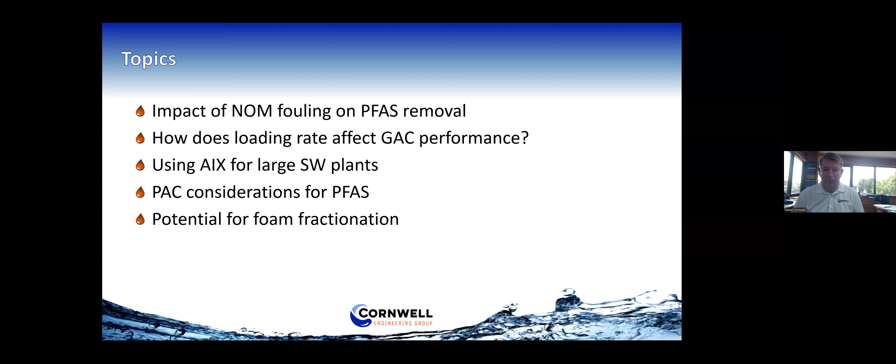We'll talk a little bit about NOM fouling on PFAS removal, how loading rate affects GAC performance. I'd also like to talk about anion exchange for large surface water plants, some PAC considerations, and potential for foam fractionation. So we'll just hit the high points of several of these items and show you some of the things we've been finding.

First of all, this is some work done at Passaic Valley Water Commission. Jim Mueller is going to talk, I think tomorrow, on the overview of what they're doing and how they're handling this project. But this is some pilot testing they've had us doing for quite some time on GAC. The first thing we did, in what we called phase one, is look at 4 different carbons, and we tested empty bed contact times of 7.5, 15, and 20 minutes. I'll talk about that in just a second. All this testing was at 2 GPM per square foot, below what you might actually design for. And we came up with these results. Of course everyone here knows 15 to 20 minutes is the traditional empty bed contact time used or recommended for, in this case, PFOA. PFOA is their limitation—they have PFOS over the level also, but PFOA is the limiting compound here.

So you can see, first of all, I'm just showing a traditional breakthrough curve—you'll see a few of these here. For PFOA, this is one of the 4 carbons. I plotted this as actual concentration, and we've called the detection level 0 in this particular slide, as you can see. This is showing the breakthrough curve. So the first thing to note is at this 7.5 minute empty bed contact time, PFOA was removed below the detection level.

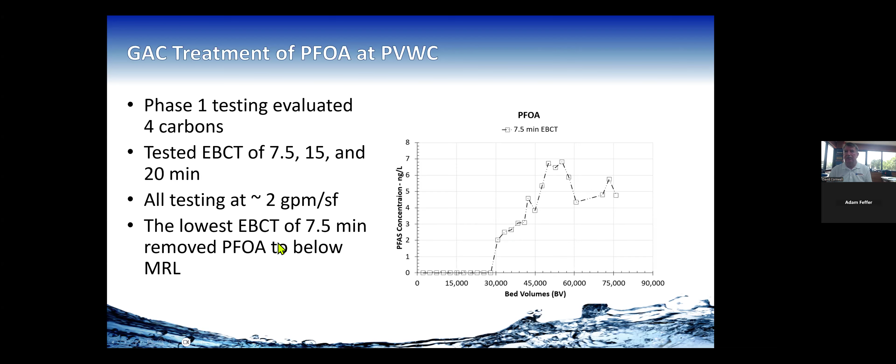Let's look at now what happened at the other empty bed contact times. I'm showing all 4 carbons here. This one down in the bottom right is the one we just were looking at. You can see the gray here is the 7.5 minute. Then look what happened: we went to the mid, the 15, that's the middle port, that's the 15 minute in blue, and the 20 minute is in red here.

You can see that a couple of things happened. One critical thing is the bed volumes got smaller - less carbon utilization, quicker bed volume breakthrough as the empty bed contact time increased. That's classical NOM fouling. As soon as you'd see that, you'd say we've got NOM fouling going on here. That's one of the reasons we tested this smaller bed volume.

These were kind of just the general conclusions. You can see the ranges here of bed volumes treated from 7.5 up to 20 minutes, and what that looked like just a little bit as we were doing our experimentation.

The other thing that's going to be important as we talk about this plot: particularly at the 15, because we were kind of running out of time and effort in this phase 1, we didn't get the 20 minutes all the way we'd like to. But you can certainly see at the 15 minute here this curve is steeper - again, not unexpected with NOM fouling that we're going to get a steeper breakthrough curve. This will be important in some of the data analysis as we go forward. As we moved out here a little bit, we get a steeper breakthrough curve than we got with most of them at the 7.5 minutes.

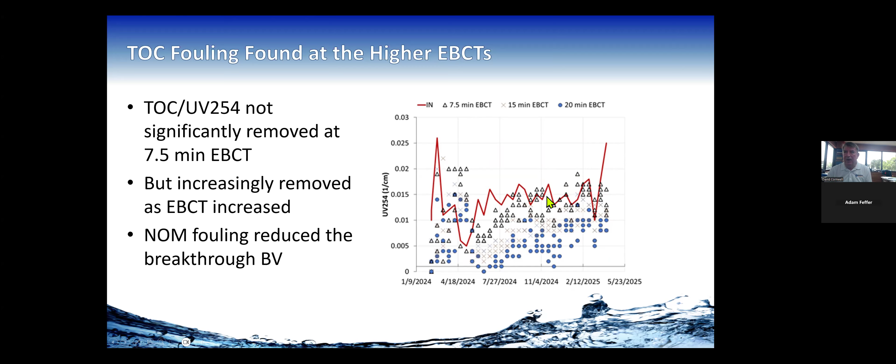You can see quite distinctly here what happens with the UV and TOC - a similar effect, but it's a little better spread out here. 7.5 minutes are these triangles. You can see there's a little removal at the beginning, but as time went on, there's almost no removal, taking half at 7.5 minutes, which is not unexpected for TOC, right? We designed TOC contactors that take 15 to 20 minutes to remove much TOC.

And you can see as we move down here, we've got the X's as the 15 minute - certainly below, more is coming out - and we've got the blues here at the 20 minutes, more is coming out. So we certainly were taking out, especially at these higher empty bed contact times, quite a fair amount of the NOM, and that was causing fouling in the micropores, and we weren't getting as efficient carbon usage.

So what does that mean if we design for a longer time than where we have NOM fouling? Because 7.5 minutes is not traditional, right - we don't usually design for PFOS, PFOA according to literature for 7.5 minutes. I will say New Jersey DEP has been very cooperative with us at Passaic Valley as we move forward to decide. They haven't decided what they're going to do yet, but as we move forward...

What would happen here if you had the same mass of PFOA removed as you increased empty bed contact time where you got fouling? You'd of course have poor GAC utilization, meaning more GAC regeneration because fewer bed volumes are being treated. In practical terms, that's more truck traffic, more pounds of GAC being regenerated, and a higher regeneration cost. So all of this results in generally higher regeneration, more traffic, more pounds, if you're breaking through sooner in terms of bed volume for the same mass of PFOA removed.

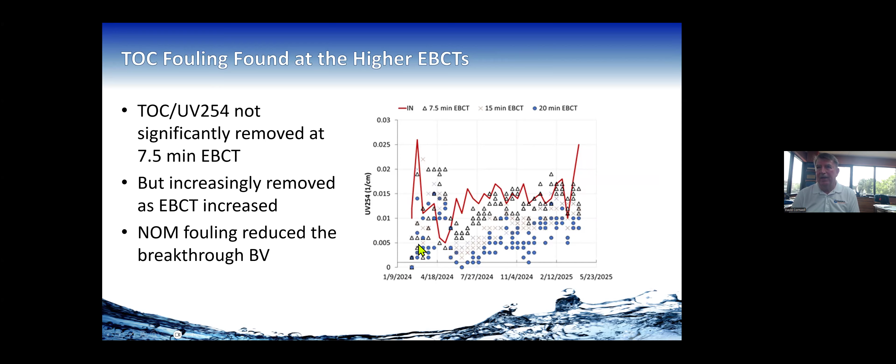There's some indication that it's going to get worse. You can see here that the fresh carbon at 20 minutes was way down here in UV. So if I had 40 minutes, more of the bed is at 20 minutes or plus, I'm very likely to follow something like this. If it just stops totally, no more NOM fouling, it'll still be less, but it won't be drastic. So you could be somewhere here.

The lesson learned is don't operate all your contactors if you have NOM fouling. Keep some contactors turned off and try to keep that EBCT down.

I want to remind everybody about the benefits of blending. This is again the example for Passaic Valley. They have a situation where on an average day they might have 6 to 7 of their 10 contactors, depending on what the final design looks like, going through this. And here's the breakthrough curve, the same one we've been looking at, that may be done again, exactly where you cut it off could be done somewhere in this 35,000 bed volume range.

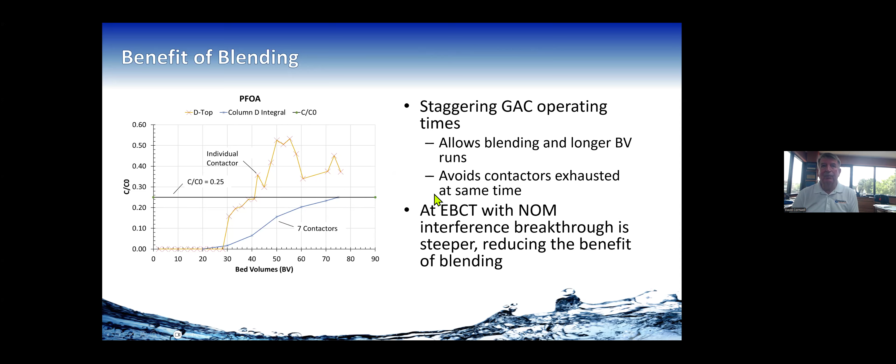If you do blending by staggering the operation, first advantage, they don't all stop at the same time. I don't have to regenerate them all at the same time, but you also spread that out so that your blended water going out of the plant never exceeds your goal. Now I'm up into the 60,000 to 70,000 bed volume range, almost doubling the bed volumes by operating with blending. So don't forget that. You may be doing it, but if you're just cutting these off here instead of looking at your blending situation, you may be using carbon much faster than you need to.

The last thing on carbon I wanted to talk about, we know this from the literature: when you have a micropollutant and you increase flow rates or loading rates while keeping the same empty bed contact time, you should get the same breakthrough curve with a micropollutant because it's micropore limited.

I'm just showing here, we did test this. Our original was at 2 GPM per square foot. We tested 4 and 6 - 4 being the purple, green being the 6, and all the others being 2 GPM per square foot. Very, very similar breakthrough curves. You're always going to get some differential, but very similar ranges as we get into this 4 range. It's so impractical to test 6 GPM per square foot at 20 minutes in contactors because you need 2 or 3 of them in series in a pilot plant. So it's much easier to test lower flow rates, and then it should be the same going forward.

Anion exchange - just a little bit on anion exchange. Normally, as you all know, this is operated in pressure vessels, but limited to about a 12-foot diameter. Guidance also says for a surface water plant, use a pre-contactor cartridge, some kind of cartridge filter ahead of that to take out small particles. For a large plant, both of these are impractical.

You'd have a whole farm of vessels out there. So we went ahead and said, hey, what the heck, we're going to test gravity without pre-particle removal. We had some indication gravity would be fine. We didn't know about the pre-particle removal not being used. You can see here, these are still running, and we're now at almost 140,000 bed volumes with 2 different anion exchange resins that we're using. So far still very successful in those operations, and we'll see where we get into in terms of breakthrough. But again, this is our gravity system, 6 GPM per square foot, empty bed contact time of 3 minutes.

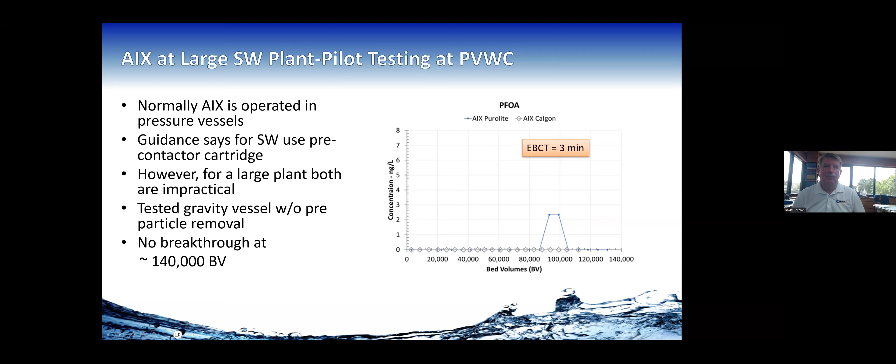So first of all, pick a good product. Secondly, what I'll talk about is the possibility of recirculating the PAC. We know that the PAC in a one-pass system is not utilized very fully.

So what we did in the laboratory is a series of testing where we either did a pre-contact tank or just rapid mix, and added the PAC into there. We found rapid mix worked pretty well. Go ahead and do your coagulation, flocculation, sedimentation, take the sludge off the bottom, and recycle it. In this case, it was an iron coagulant. Recycle the PAC and the iron back around to the front end, and you have your treated water come off.

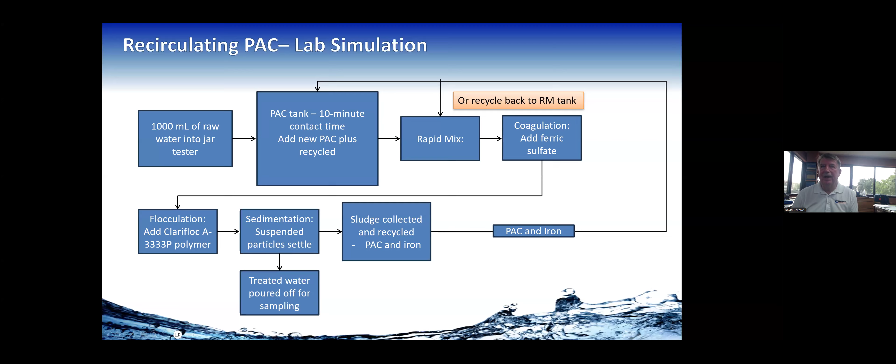In other words, we always think PAC is not practical, not useful. Well, the pounds used is pretty close to the same, which is kind of amazing. So PAC might be something you still want to look at. Obviously, you don't have to build all those contactors and things.

Last thing I want to talk about here is, I guess I've worded as Cornwell, we're excited about the possibility of foam fractionation. Temple University, if you get a chance, look at some of the things they're doing. I don't know if anybody from Temple is on this today. They've been doing exciting things. I'm only aware of one company trying to work on this, which is Evocra. There may be some more, but they seem to be the one that are out there for the most part.

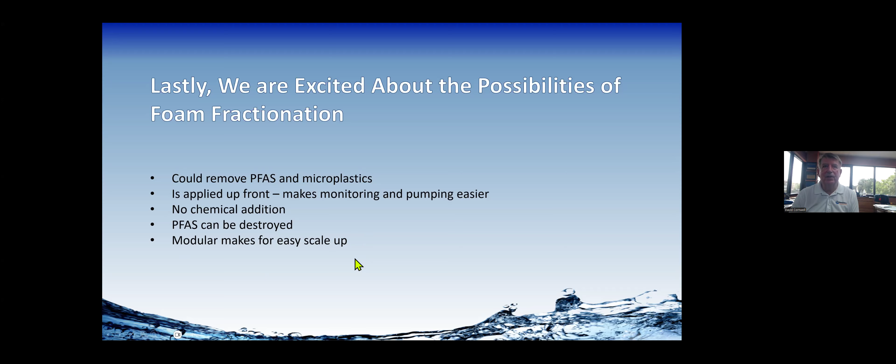If you're removing the microplastics, you probably don't want to recycle it. So you might want to come off of this concentration system and discharge this in some way. It has no PFAS in it, but it could have microplastics. Where do they go? I don't know. It's something we have to figure out, but I find that quite interesting.

So my summary for today, this morning, to get us all started is, unfortunately, the compliance window is very tight. And that means for utilities, they have limited time to explore and develop new technologies. I wish there was more time. But if you've got to start designing and installing things, you can't start studying things very well either.

Some utilities might be able to use short-term compliance measures to allow technology to catch up and not build massive GAC contactors or something like that. Maybe PAC is one of those things that could work. I pointed out some of the issues to keep in mind if you have NOM for GAC. And just a very interesting conflict: optimal PFAS removal is achieved when TOC is not removed. But EPA is kind of thinking we're going to get a dual benefit here of PFAS and TOC. If you optimize PFAS, you won't get TOC. If you optimize TOC, you're really going to be using up carbon for PFAS.

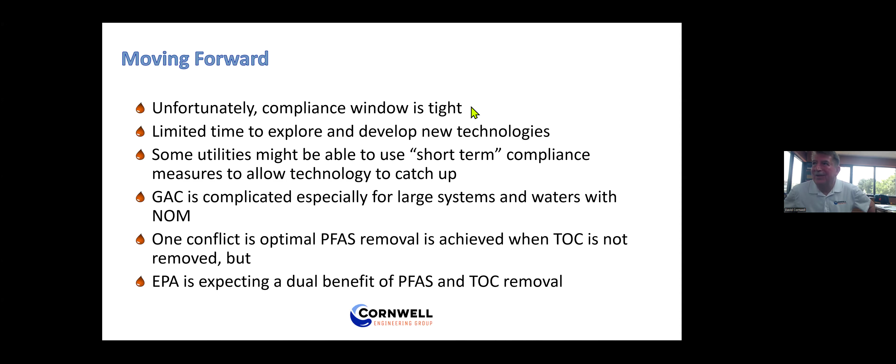Welcome, Eric. So a couple of questions. The PAC that you were talking about, how was it applied? As a slurry?

How was PAC applied? Well, Pat, we did the PAC, of course - that's laboratory work. We do slurry at first because we want to get it pre-wetted. If you're in a full-scale plant, I like slurries. You could use a slurry PAC system, or you could dry feed it if you've got some mixing for it ahead of time.

Okay, and the other question - did the anion exchange media require backwashing? What was the frequency and head loss buildup? Was chlorinated water used? Good, very good questions.

No chlorinated water on these particular resins. It does have to be backwashed. And we kept the loading rate to 6 GPM per square foot because the head loss with the ion exchange gets pretty high.

It was quite reasonable at 6. It was in the 3 to 4 range. I think we could have gone a little bit higher than the 6, but that's also probably where GAC would be designed. So the contactors could be almost the same contactor for GAC or ion exchange.

I don't have the frequency right in front of me. I want to say that was in the 4 to 6 week range where we did have to backwash, and we keep it below fluidization velocity, just like GAC. So it did require backwashing, yes.

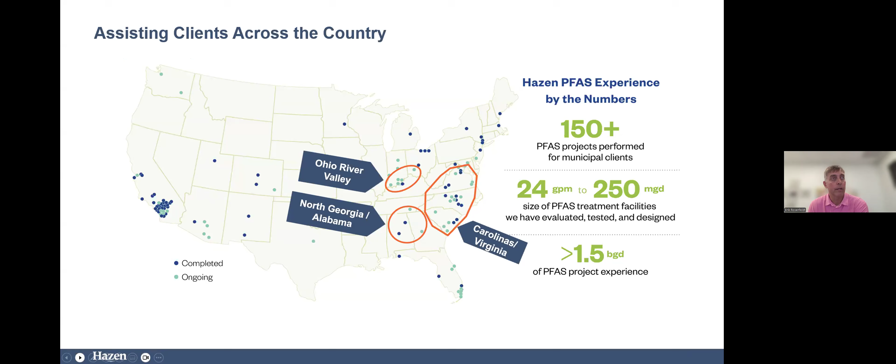And what have we learned? Well, we've learned that surface water treatment for PFAS is somewhat unique. Some of the things that Dave talked about are certainly lessons that we've seen.

But a few of the big things to keep in mind is that the water quality in these plants are often variable, wide ranges over time and space, with everything related to TOC, algae, lots of other water quality challenges as well. In addition to that, our PFAS levels are often variable - so you may have wide swings in PFAS from day to day in these surface water facilities.

And another thing to think about is there's often already a robust treatment process in existence, one that's been designed for surface water treatment. So a lot of these PFAS treatment processes have to integrate within that existing treatment plant. And so whatever treatment process we use must be effective for PFAS, robust to variable water quality, and ideally provide multiple benefits. Challenges we face include plant hydraulics, often space constraints, of course operability and constructability, and then funding these projects is always a challenge.

So this isn't new for surface water utilities. They've been fighting the fight against water quality challenges for years. And often we can look at operational approaches or infrastructure approaches for a lot of water quality treatment enhancements. So a lot of things can be managed by tweaking current operations. Some of these things definitely need additional infrastructure added. And then there's this gray area where there's things that we can do operationally and infrastructure-wise. And I'm going to loosely say that PFAS kind of fits in there.

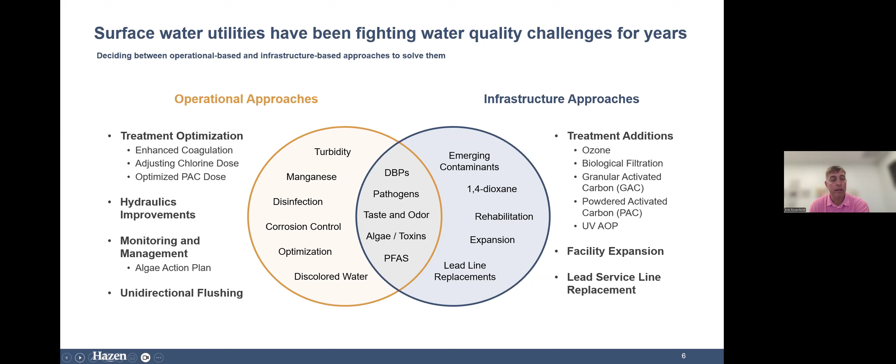Typically, we do have to do some sort of infrastructure improvements, but the idea of PAC allows us an option that most utilities at least are familiar with, and many already have some infrastructure to deal with. And I'll explain that a little bit more. I'm not going to go through this, I don't have time, but PAC has several advantages, lots of potential concerns.

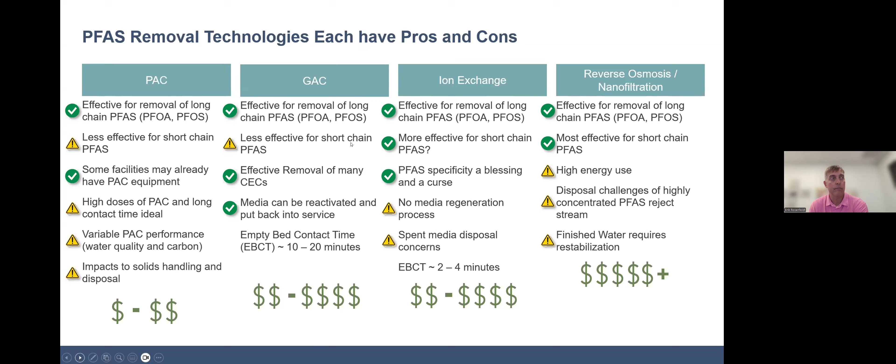GAC is another effective technology with a few more advantages and a few less concerns related to PFAS treatment. Ion exchange is sort of similar, and then of course reverse osmosis and membranes are highly effective but significantly costly. And we've actually seen more of these high pressure membrane operations for PFAS solutions on surface waters, which has been a little bit of a surprising observation over the first few years of PFAS treatment.

So the first study I'm going to talk about is in South Carolina, and the question here is deciding on GAC, and it's really what factors went into understanding whether GAC versus PAC was the option to go with here. So this is an eastern lowland surface water. It is not an easy surface water to treat. It has high natural organics, high manganese, lots of algae, taste and odor compounds, potentially some cyanotoxins as well. And then recently, of course, they found PFAS in these sources.

There's two water plants here fed off a large river, and the water plants are connected through a canal and a series of reservoirs. And so both plants have challenges with all of these water quality issues, and we're looking for a solution clearly to address PFAS, but then also to look at creating a more robust process for some of their other challenges.

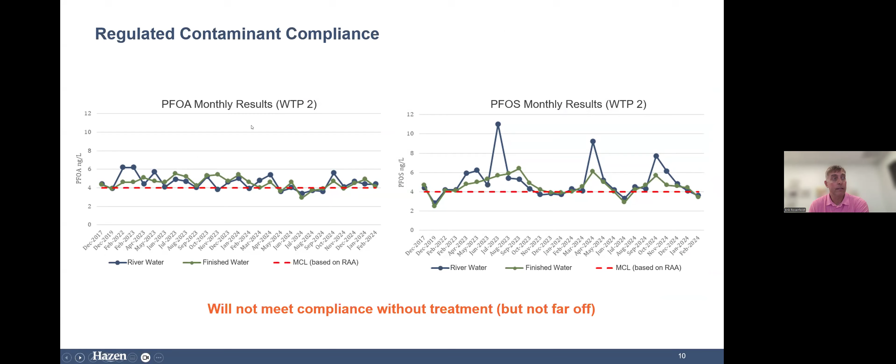So the PFAS challenge is something that we often see with a lot of surface waters. It is above the limit, but not a whole lot above the limit. This is another thing that we've been seeing a lot with surface waters: rarely do you see anything above 10, but sometimes you might see a spike above 10 for PFOA or PFOS. So this system will not meet compliance without treatment, but it's not far off.

So our client first underwent a rigorous technology selection process where they piloted advanced activated carbon techniques, both powdered carbon and GAC, as well as ion exchange. They decided against RO and nanofiltration membranes prior to piloting, but they definitely piloted GAC and ion exchange. Benefits for the activated carbon were that both provided effective PFAS control, GAC provided robust current and future contaminant control, and then, of course, there was flexibility in how to deploy it.

The concerns they identified were operational intensity of PAC, and of course, on the other side, GAC was a more capital-intensive process. So they decided to employ either PAC or GAC to address PFAS and additional water quality concerns, but we had to help work through that process of GAC versus PAC. So the first thing we did was look at the benefits of powdered carbon versus GAC. There was another option that they looked at, but this became expensive and didn't see a whole lot of benefits over the other two.

So powdered carbon was effective for their PFAS challenges. It was effective for algal-related taste and odor, less effective for DBPs in the testing that we looked at. It didn't provide quite a solution for manganese; distribution system and other things were not quite as addressed, but it was significantly less expensive. GAC for PFAS was very effective, good for algal-related taste and odor, excellent for their DBP challenges.

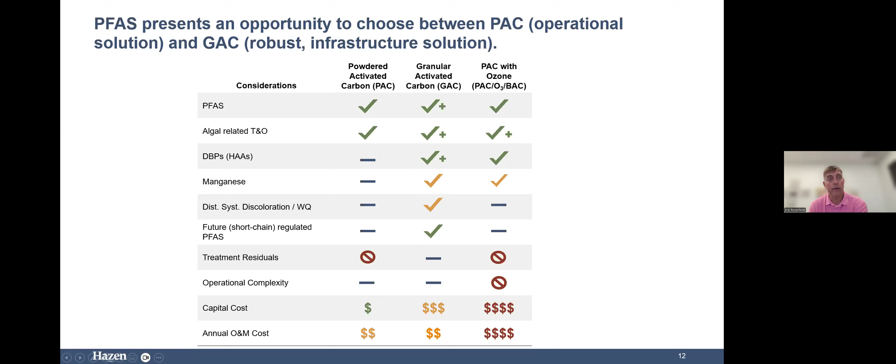It allowed them to chlorinate their existing filters more aggressively, so it opened up an opportunity for better manganese control, also less distribution system discoloration as a result, and then there were some other added benefits. So we got lots of benefits. We can see lots of benefits for GAC, but the challenge, of course, is that GAC is significantly more expensive. So we weren't going to get our way out of here on a life cycle cost analysis.

Even though powdered carbon required some improvements for residuals and it would be an operationally intensive process, it was still significantly less expensive. So how could we work with the utility to create a situation where clearly the benefits were outweighing the cost difference? And we did this through an MCDA process, multi-criteria decision analysis, where we talked with the client and we weighted their economic, regulatory, O&M, and then community benefits and costs.

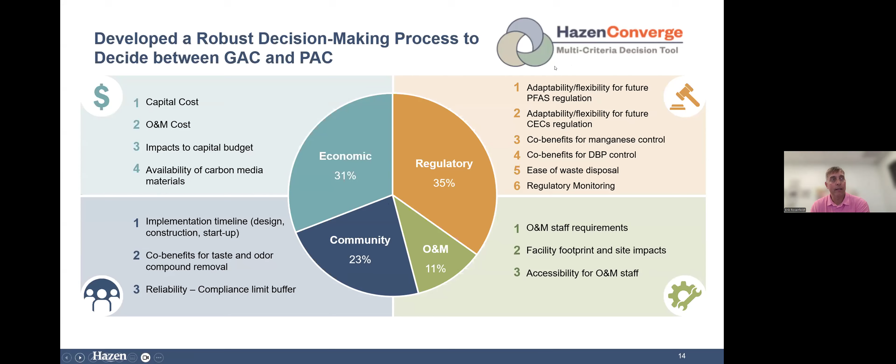So you can see that yes, economics were of concern for them, but it wasn't an overwhelming concern. It came out to be about 31% of their concern pie, and the other options like regulatory and community were really the ones that lifted the analysis. So at the end of the day, working together with the utility and the decision makers, we were able to understand that the water quality benefits that they'd see with GAC clearly were more important to them than the cost challenges.

And so the decision was to go to GAC, utilizing this transparent cost benefit analysis approach to make it clear that they could see the benefits of the additional water quality, and that was important enough for them to overcome the significant cost differential between PAC and GAC.

So the second study I'm going to talk about is one for a client where we came up with the exact opposite solution, right? This one decided on PAC, at least for the short term, and this got to Dave's idea of let's implement a short-term solution where we might be able to do some things in the longer term that could allow us to avoid a more capital-intensive project.

Again, this is a Virginia utility, a large utility, 125 MGD, and they have PFOA and PFOS in their finished water, but also in their source water. Averages are slightly above the limit. Their maximum doesn't even get up to 10, but especially for PFOA, they're above 4.0 nanograms per liter 82% of the time. They do have additional PFAS chemicals that are detected, but they developed these solutions for PFOA and PFOS at this time.

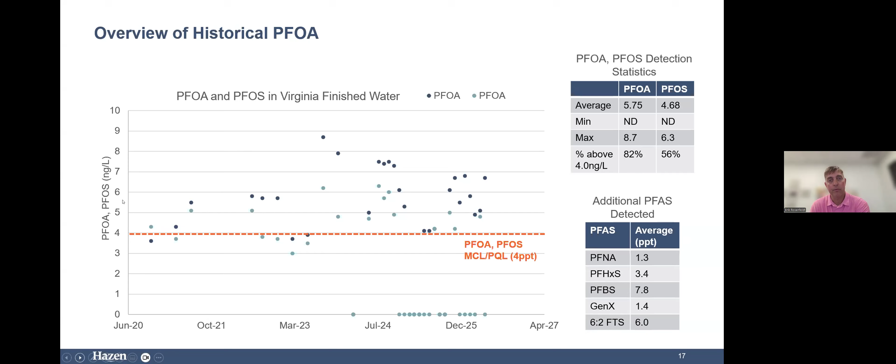And you can see again where I talked about highly variable from day to day, week to week, month to month. There's significant changes in PFOA, PFOS, but also other water quality concerns as well. This is a robust treatment process. It has ozone and biological filtration. And we were really looking at three different options: powdered carbon up front, post-filter GAC or ion exchange, or replacing the biological filtration with filter adsorbers.

The PAC advantages, again, least expensive capital option. It's under design right now, and a little bit of a spoiler, it's about a $20 million solution. The PAC has to be fed at 25 to 30 milligrams per liter, and it can effectively remove 40 to 50%. Concerns that were in the mix include long-term PAC disposal concerns. It may impact their current residuals handling processes. We still are working that out. And then an operational strategy is yet to be determined.

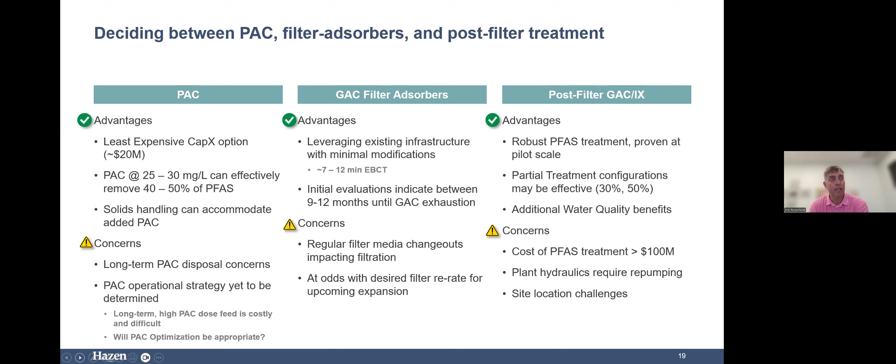Clearly, with that wide variability, sometimes above, sometimes below the limit, we would like to be able to increase and decrease our PAC dose as appropriate to save some costs. GAC has its advantages, as does ion exchange, and there's significant costs related to those as well. We did see a difference with added detention time. If we fed at the intake versus at the front of the plant, we got about a 20% dose reduction in PAC.

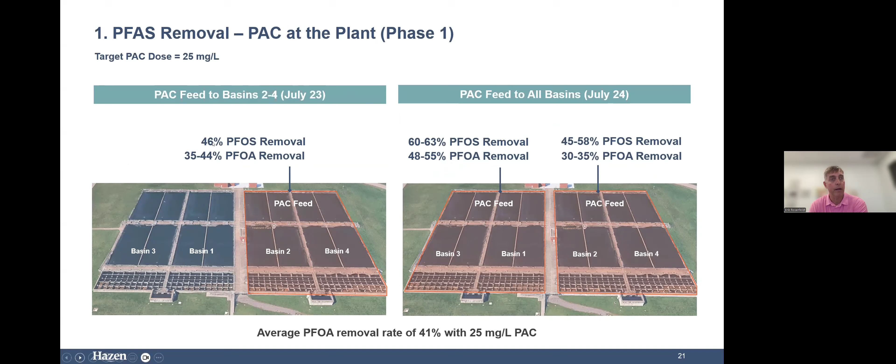We did a full-scale test, which was really interesting. We looked at half the plant and fed PAC up front, and we saw about 46% PFOS removal, 35 to 44% PFOA removal. At the end of the day, we came up with a PFOA removal rate of about 41%, which was our target, and PFOS was a little bit better with 25 milligrams per liter PAC. And moving forward, there's several things that are going to happen here. They're moving forward with the PAC design and construction.

So that's going to be a short-term solution. But in the meantime, there's lots of things that can be done in terms of source water protection, additional research looking at other treatment alternatives, and then even some legal action to understand the long-term solutions.

And the final thing I want to talk about is this is a really interesting system that a lot of people probably know about. It's located on a reservoir that has an advanced wastewater treatment plant up front. And there's lots of places that have been identified as potential PFAS sources. And we're currently working with the Water Research Foundation on what we call the One PFAS project, looking at a system-wide approach to managing PFAS chemicals and trying to understand whether,

where are most cost effective to provide the most benefit to the entire system would be considering improvements at the water treatment plant, considering potential PFAS related improvements at the wastewater treatment plant, or even considering potential interventions throughout the entire watershed, more stormwater type interventions to understand if maybe this PAC solution is the right solution

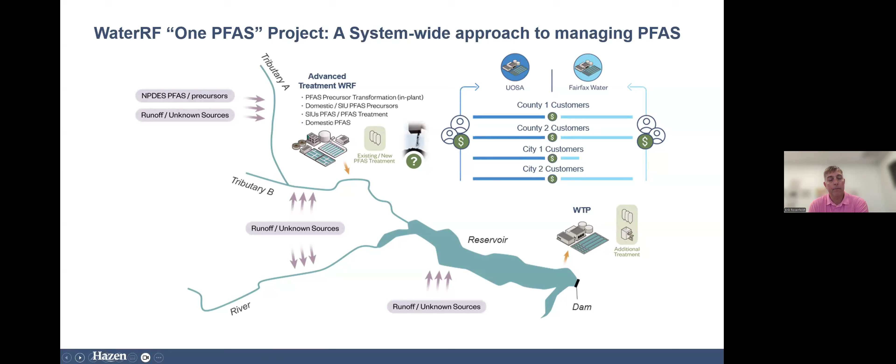for long term because we can find ways to really reduce levels in the source and throughout the system, or even to look at treatment options that might be more beneficial if they're applied upstream somewhere, either at the wastewater plant or even in their collection system with significant industrial users. So keep an eye out for the results from that One PFAS project in the next couple of years.

So in conclusion, surface water treatment for PFAS is relatively unique. There's a lot of things that are needed, including a barrier that can effectively treat PFAS and handle all sorts of changes in water quality, and also manage potential hydraulic challenges and site constraint challenges, things like that. Surface water systems are often larger systems than groundwater systems, not always, but often, and therefore size and scale of effective treatment plants are really important to consider.

And then there are operational approaches, high dose PAC, infrastructure approaches like GAC, ion exchange. And then, as I mentioned, membranes seem to be gaining traction in surface water applications, which has been interesting to watch and be a part of. And then when deciding between technologies, both cost and non-economic factors can play a role and can lead you to very different solutions based on, of course, the desires and the philosophies of the utilities. And then multi-criteria decision analysis can be helpful in making this.

And then finally, in these surface water systems, it's important to remember that active source water control can hold the key to cost-effective PFAS compliance. We're typically not well above and not consistently above the 4 part per trillion limit. And there are opportunities if we can work together collaboratively. It's not easy, but if we can find ways to work together collaboratively, there might be opportunities to really come up with effective holistic solutions and save ratepayers significant amounts of money.

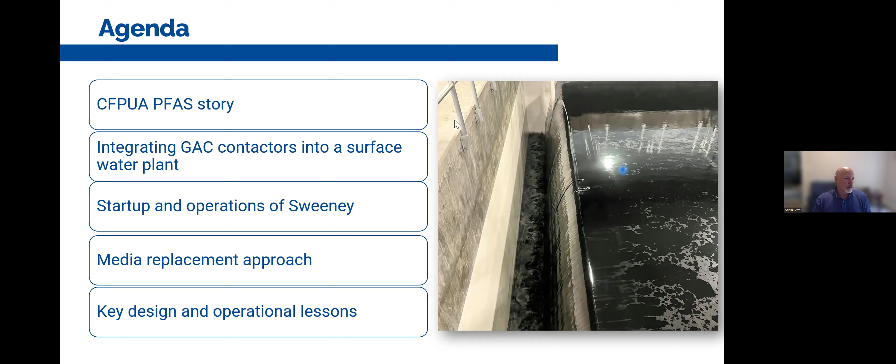As far as we did piloting and evaluation, we ended up on a GAC post-contactor solution. This is their process train: super pulsators for pre-treatment, followed by intermediate and raw water ozonation, biological filtration with GAC, and then the contactors. It was thought best to fit them into the process train after the biofiltration.

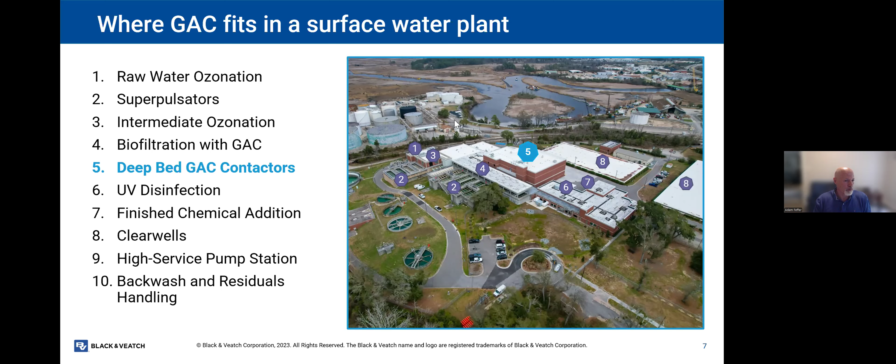This is another way to do it, showing the same HGL considerations, identifying the different changing flow conditions. With surface water, you are going to be more subject to temperature changes and seasonal variability than you might be for a groundwater system, and that has to be considered when you're looking at that head loss and trying to design for worst case conditions under gravity flow.

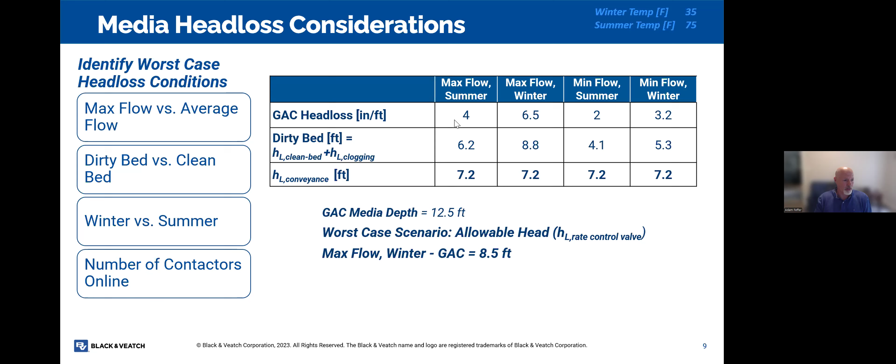The media loading is something people might take for granted: when you are taking media away, it's wet, and wet media is heavy. The limiting factor on transportation of the media is the weight for DOT restrictions on the road. So you need roughly double the number of trucks to unload wet media as you do to load up the dry media when filling these contactors. At least in Cape Fear's case, it's 2 to 3 days of work for loading the contactor with the slurry system in place.

Based on their water quality goals, they were very, very intolerant of any impairments to their treatment goals resulting from the GAC. So we had to wash away pretty much all the arsenic before we put these contactors into operation. That meant 6 to 10 days of backwashing, about 75 bed volumes, before we were able to meet their TDS, arsenic, and pH water quality goals.

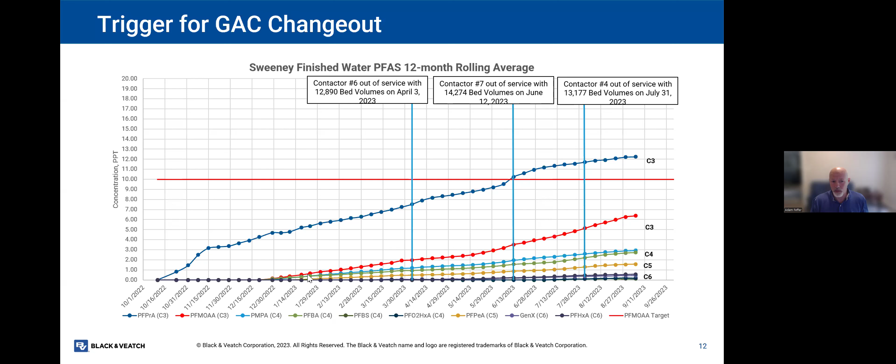What you're seeing here is some water quality impacts, where they did better with their first run than with subsequent runs, so they ended up a little behind. What they would say is they had to do some shorter changeouts.

As far as the cost associated with this, Cape Fear did set a very aggressive changeout target, so these costs are a little more dramatic than you might see at a facility treating exclusively for PFOA and PFOS. But the main takeaway here is that for a 44 MGD facility operating for PFAS on surface water, the vast majority of the cost is associated with carbon changeout. So any optimization you can do of media usage will yield the biggest bang for your buck in O&M cost reductions.

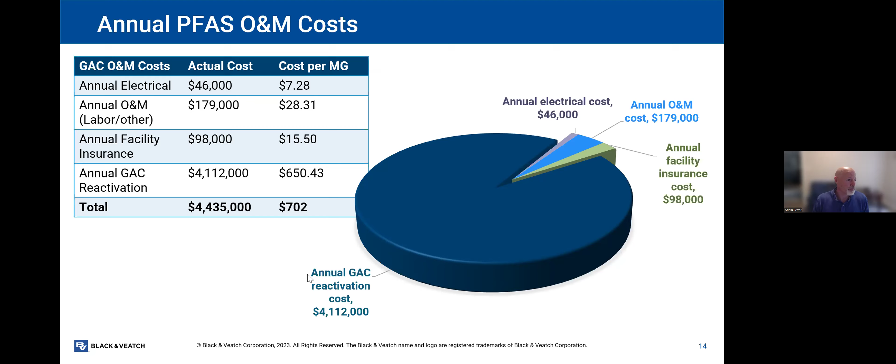Getting into the media replacement approach -- I won't spend too long here since others have mentioned it -- but staggering your breakthrough is extremely important, both from an operations feasibility perspective and from a media utilization efficiency perspective.

This also helps with your startup impacts from arsenic, pH, and TDS, managing those one at a time versus all at once.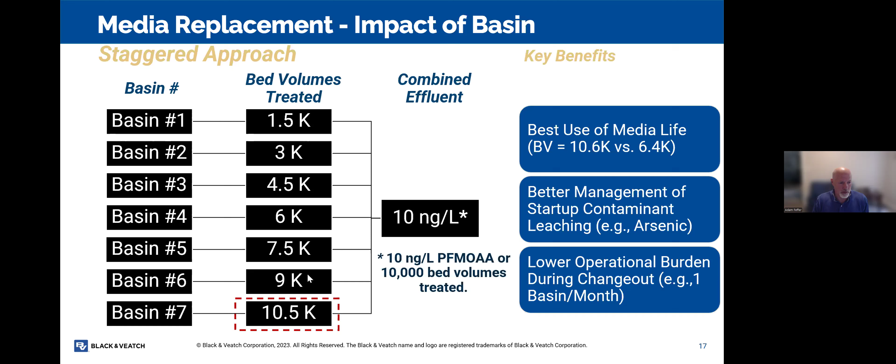And contractually, Cape Fear was recently able to introduce, I think it was a 14, maybe 15 percent cap into their regeneration contract, so they don't have to pay in excess of that if the regeneration doesn't go as expected.

And I think this is a really important point here in terms of determining the redundancy of design. Sweeney operates on average below 50% of their design capacity. And GAC reactivation time is 45 to 60 days from the time it gets removed from the contactor until the time it's available again. So they realize there are significant operational savings from being able to receive GAC from trucks into a contactor at the same time that the trucks are taking out spent GAC. So coordinating the replacement of receipt and delivery of GAC yielded some really significant savings. But they could only do that because they had that space in between their average capacity and their design capacity.

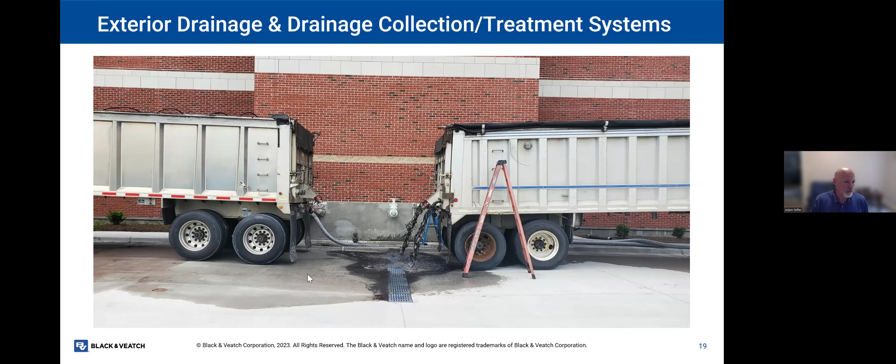So just a summary, getting to the end here of the key lessons learned. Surface water is more variable than groundwater, so you have to be prepared for the worst case challenges in variation. It's very important to understand your hydraulic grade line, and there are impacts to other processes like UV impacts, disinfection impacts, potential CT impacts, and unit process performance associated with the PFAS treatment.

In operation, you really need to have good design for your truck traffic, runoff, and conveyance connections to facilitate life for your operators long term. Balancing reactivation turnaround with your treatment demands is critical for design. So you don't want to over design, but you also don't want to under design and then be slammed for production capacity when you're needing to regenerate spent contactors.

Have a real smart plan for how to deal with the water from up to 6 MGD in the case of Sweeney for each contactor replacement. Make sure you have a plan for staggering your breakthrough so that you have one contactor at a time, and optimizing media life is really your big lever for minimizing O&M costs.

And with that, I'll take questions if there are any.

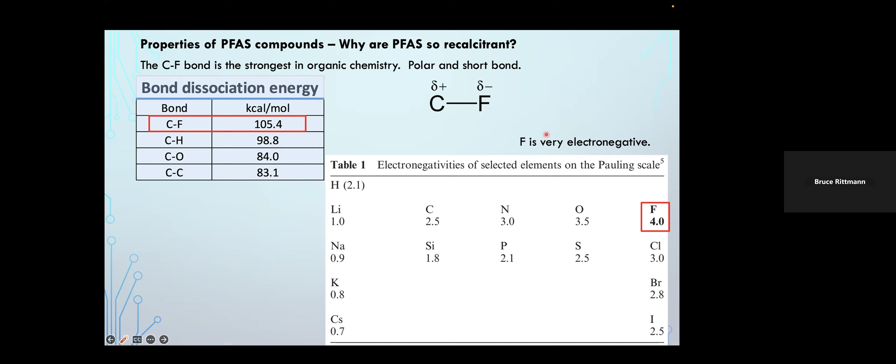So why are they so difficult? There are a couple of corollary reasons. One is that the carbon-fluorine bond is the strongest bond known in organic chemistry. Its bond dissociation energy, as you can see on the upper left, is much larger than any other bond, so it's hard to break. It's also a very polar bond, because fluorine is extremely electronegative. This makes the bond very short and very strong, but on the other hand it also gives us the possibility of defluorination and destroying it through a reductive process. That's what I'm going to talk about here.

Now, I'm the director of the Center for Environmental Biotechnology. I love to biodegrade things, but that's difficult to do with PFAS, especially the perfluorinated ones, because the C-F bond is so strong, and in the perfluorinated ones the C-F bonds are everywhere on the molecule. So it's really hard for microorganisms and their enzymes to access the molecule—this is really difficult.

So what we want to do is knock off some of the fluorine substituents—that is, defluorinate it—taking advantage of the strong electronegativity of the fluorine element to do reductive defluorination. That's what I'm going to begin with today. So how do we do that? Well, we actually do this in two stages.

The first stage is just what I said, reductive defluorination. And as I will show you, we're going to use palladium-based nanoparticles to reductively defluorinate. And you can see there's a little example here. This is PFOA, and you use hydrogen, and you knock off some of the fluorines here and replace them with hydrogens. And now once you've done that enough, then the molecule becomes available for oxidative processes.

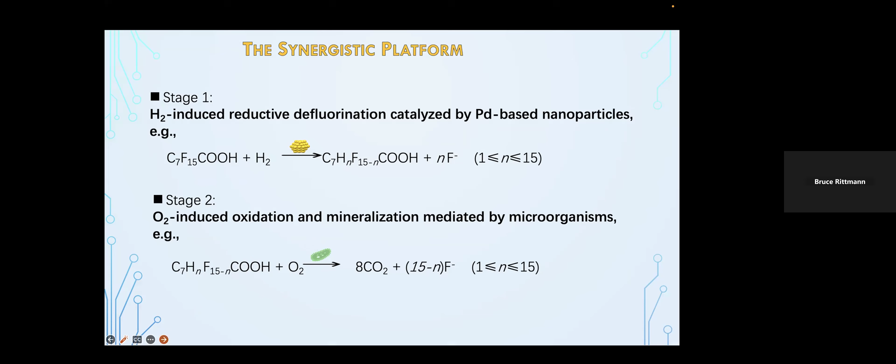And we're going to use microorganisms in what I'm going to talk about today. And they will do an oxidation process that will attack the carbon-carbon bonds as well as more of the carbon-fluorine bonds. And so when we combine these two things together, we can get the complete defluorination and mineralization of these perfluorinated compounds. So in the system I'm going to describe today, we do it in two stages.

Now, the first stage is the hydrogen-based membrane catalyst film reactor. We're going to deliver hydrogen gas through gas transfer membranes. Deposited on the outside of the membranes is a palladium-based nanoparticle film that is really good at reductive defluorination. I'll show you that. Then we're going to take those defluorinated compounds and deliver them over to an oxygen-based membrane biofilm reactor. Now we have a catalytic biofilm with bacteria that are good at oxidizing and continuing to defluorinate these compounds. And so I'll talk about both stages in my talk today.

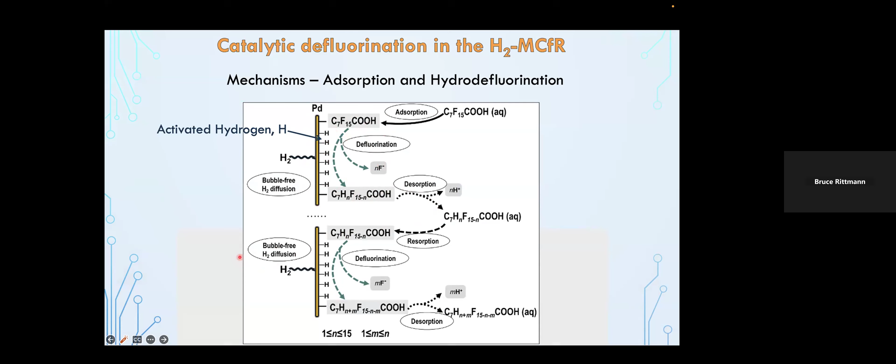So in the first stage, we're going to use palladium. Palladium is a very famous catalyst. And when you put it on the membrane here and you deliver hydrogen to it from the membrane, you get what's called activated hydrogen on the palladium. That's just a single H. This is an extremely strong reactant. So that when something like PFOA adsorbs nearby, it will then react to break the C-F bond, releasing the fluorides and producing defluorinated compounds. And this reaction can continue so that you can produce a suite of defluorinated compounds based on this palladium-based catalysis.

Now, we have to first form the catalytic film. It's actually pretty easy to do. I could show you some pictures here. It's a graph of how we do this. So when you look at the picture, the left-hand side is one of our columns with the membranes, and you can see that the membranes are white. We add a solution of palladium 2+. This is oxidized palladium. We add it as palladium chloride, and it happens to turn the water orange, which is very convenient because we can actually watch the reaction visually.

So we start delivering hydrogen through the membrane, and you eventually form a few reduced palladium nanoparticles, and then those palladium nanoparticles catalyze further reductions of palladium, and you get what's called an autocatalytic process. So if you look down at the graph, the orange bars are the palladium 2+, and you can see it starts really slowly, but then the reaction accelerates until all of your palladium 2+ is gone, and you've got this big white bar with all the palladium on the membrane.

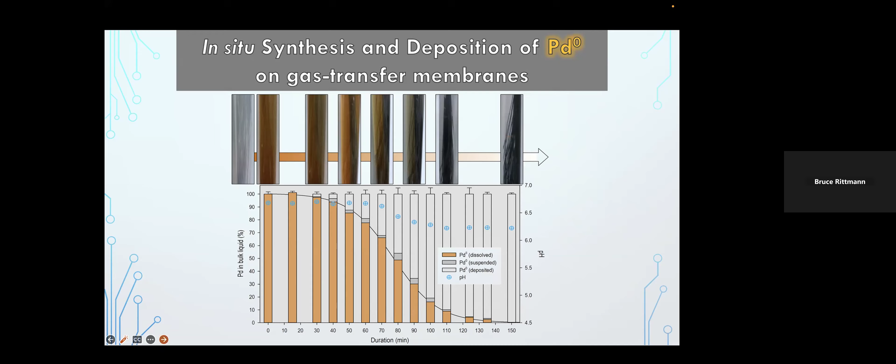And you look at the pictures, you can see that gradually the orange color goes away and it becomes clearer and clearer. And then you can see you got all these black nanoparticles on the membrane. They're very robustly attached. They don't come off. Now, once we have them in, then we can use it for PFAS reductive defluorination. I'm going to show you just one graph here. We've got hundreds of these, but this is a nice, easy one to look at.

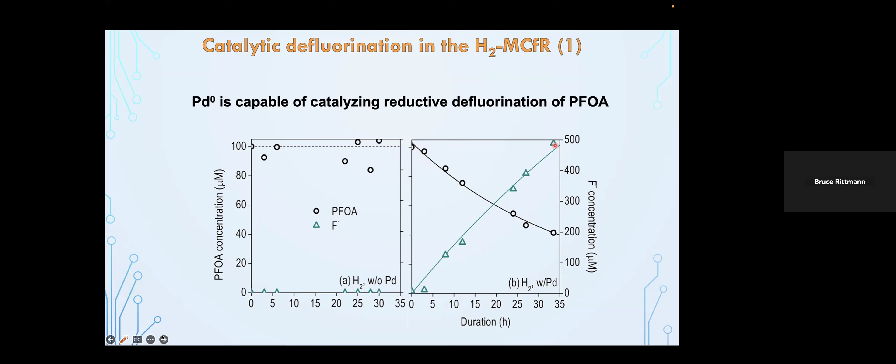So I'm just going to show you one result here of this. We've got many results, but I'm just going to show you one result here where we tried out the system. So what we did is we grew a biofilm in our aerobic oxygen-based membrane biofilm reactor, and we fed it octanoic acid, the unfluorinated analog of PFOA. And over here, we ran it for like 140 days, and we had a nice biofilm.

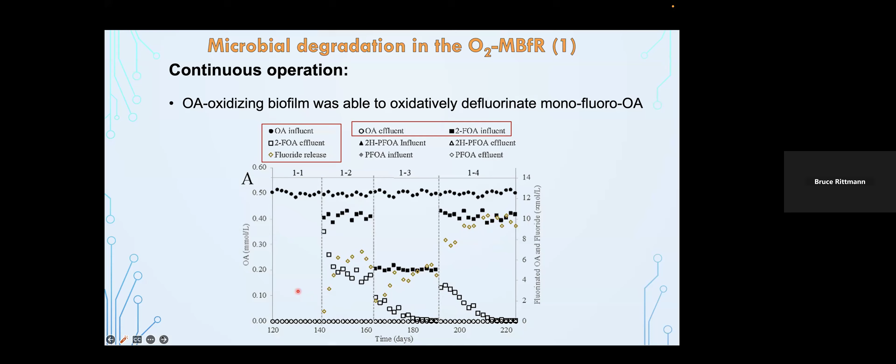We played around with the concentrations and loadings, and we always got 100% removal and 100% defluorination with this relatively easy compound. So armed with that success, we then said, well, let's make it more difficult for the microorganisms. So then we added 2H-PFOA. This is PFOA with 2 fluorines removed and 2 H's substituted in. So that's called 2H. And we added that in here at day 226. It's the same reactor. And you can see we got some immediate removal.

That was just adsorption. But then it took a little while, but then the biofilm started to adapt, and we started to see continuous removal and continuous defluorination. And as you can see, we played around with the loadings and did some different things, but eventually we got very consistent removal and very consistent defluorination here of this compound, which has only had 2 spots defluorinated. So this worked very, very well.

So how does it work? Well, what these organisms are doing is they're defluorinating and doing that in concert with a very common microbiological reaction. It's called beta oxidation. It's one of the most common reactions in all of biology. It's simply where you oxidize a chain and you eventually cut off 2 carbons. That's an acetate.

And so what you can see in this example here, this is the removal of our 2H-PFOA, and this is the production of C6. So go from C8 to C6 and removed 2 carbons. And we completely mineralized those 2 carbons on it. And you can see there's also fluoride release with it. So the microorganisms are oxidizing the carbon, and they're doing additional defluorination.

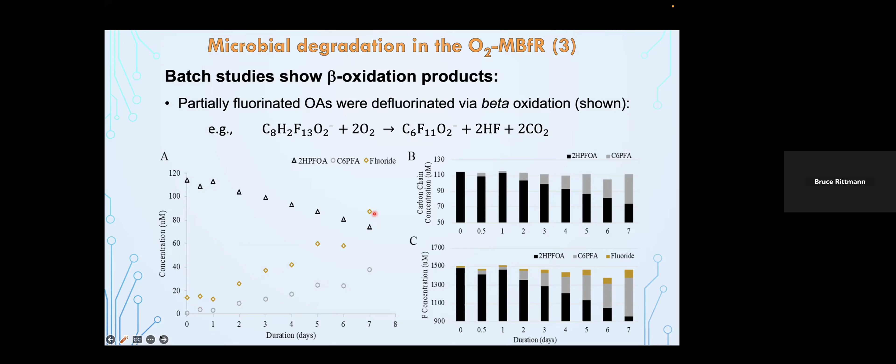And I'm not going to show you the result on this. I don't have time for it. But when we put the 2 together, we can get complete defluorination, and about half of the defluorination is in the initial palladium-based reductive defluorination, and the other half is in the aerobic biological defluorination stage. So it works really, really well.

Okay, so I'm getting near the end, so I'm just going to give you my take-home lessons here on this. So first of all, we want to do reductive defluorination using palladium-based catalytic films in the hydrogen-based membrane catalyst film reactor. And as I showed you, it's very simple to produce these palladium-based catalytic films. It's an autocatalytic process. We can do it repeatedly. We have very robust films. It works great.

We've documented that it will defluorinate PFOA. I showed you that. We've also done PFOS. We've done many, many other PFAS molecules. It works for everything. And once we get it defluorinated, then the oxygen-based membrane biofilm reactor continues the defluorination and oxidation, ultimately mineralizing and completely destroying the molecules. With that, I've come to the end.

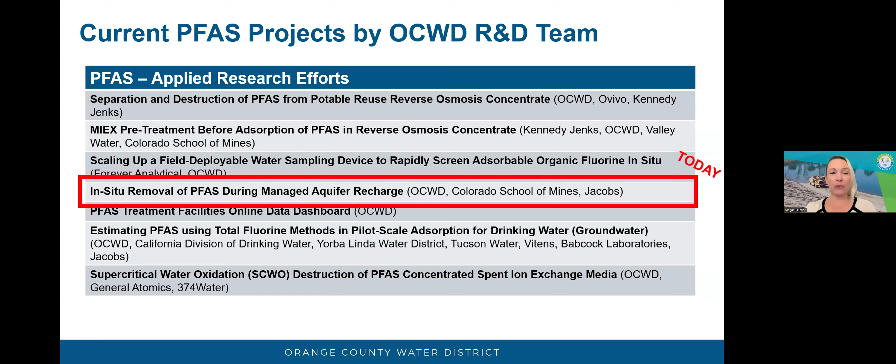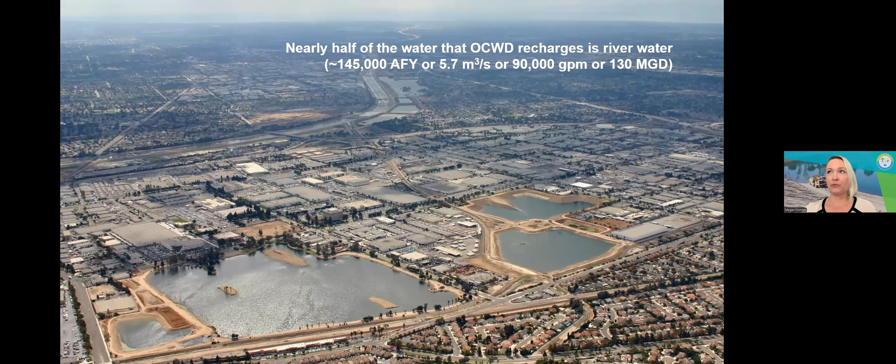So we know that water quality is improved during this recharge process through soil aquifer treatment. A lot of particles and bacteria and viruses removed, other dissolved constituents are reduced. But it's not a perfect filter, and it unfortunately doesn't remove the PFAS, which is probably no surprise to this group. And unfortunately, PFAS are present in low nanogram per liter quantities in our river water that we're recharging into the aquifer for ultimately drinking water purposes, down gradient where the wells pump the water out. So we are seeing impacts to a number of those drinking water production wells.

So we've been in the process of building ion exchange treatment facilities on the ground at those different well sites for 100 different well sites across our region. So it's a huge impact, PFAS, to our region. We're building 68, I think, different PFAS treatment facilities. Since of those 100 drinking water supply wells that are impacted and need treatment, some of them are co-located close enough that it makes sense to combine them into one treatment facility, hence only 68 treatment plants being built, driven by regulation as far as MCLs.

And before the MCL came out, we also had California response levels that was driving our journey through piloting and then treatment facility construction. But as an exploratory, essentially R&D question, we've been asking ourselves, could there be a way to remove the PFAS from our infiltrating surface water supply that's used for managed aquifer recharge at the surface by somehow engineering these recharge facilities like shown in the picture there?

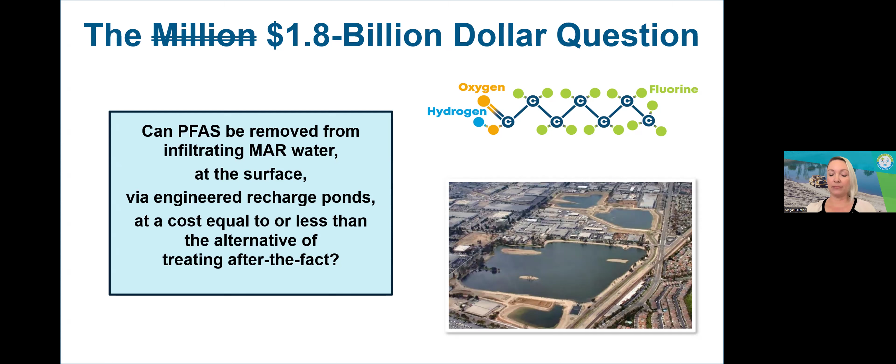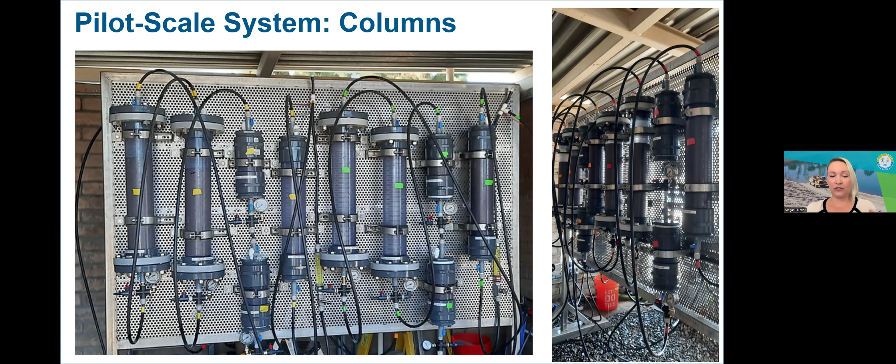Soil columns to simulate that upper layer of native soils. And then we've also built larger scale test cells, where we essentially built concrete basins that we had existing and retrofitted for this project to simulate...

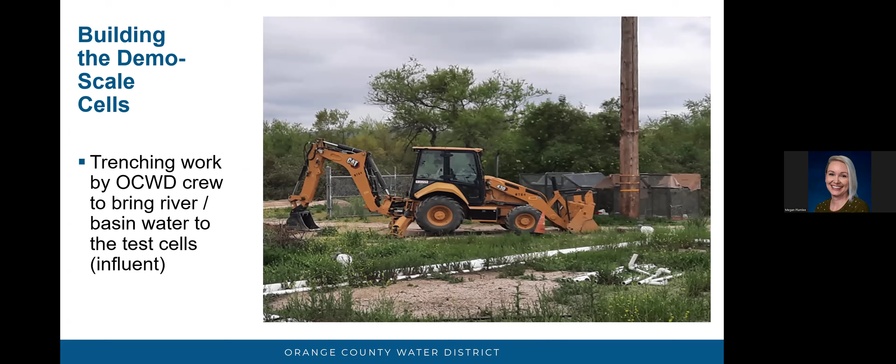...an estimate of a full-scale concept, and then separately these demo scale test cells as more of a proof of concept, kind of miniature version of a real basin. Now I have some fun pictures of building those demo scale concrete test cells, trenching to bring the water over to where those test cells were already located. Here they are, so you can see how large they are: 26 feet by 8 feet, the different cells.

Filling them with the CETCO material, not pictured here, and then this is the native soil going on top, and ultimately filling them with the water. They've been running for several months, more than a year. I can't quite remember the exact number off the top of my head, but quite some time.

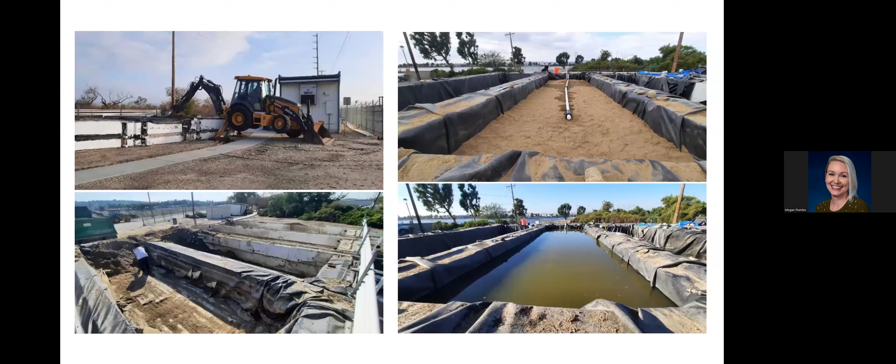So just jumping quickly to our results. Excuse me, something in my throat.

We simulated as a theoretical concept, imagining a 5-acre sized recharge pond, a terminal pond, and envisioning if we installed 4 inches of bed height of the Fluorosorb media, below a few feet of native soils. The table shows how much media we're talking about, and our estimate of what that could potentially cost, depending on the price per pound of the media.

Yeah, experienced a little technical difficulties here. Megan, I don't know if you can hear me. I don't know if you want to just maybe stop, leave and come back in. I'm having trouble here. Can you hear me now? Yeah, I can hear you. I don't know what was going on. We lost you a couple times. We lost your screen share.

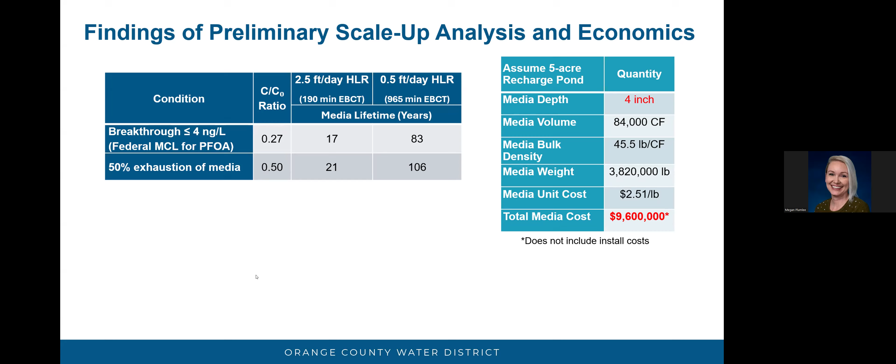Okay, I'm clicking and it's not... oh, there we go. So right now, based on the numbers we have, it's a little bit too wide of a range, too much uncertainty. We think media life could be anywhere from 17 years to that 100-plus years we were initially hoping for. So essentially what we're doing now is collecting more data.

Yeah, we lost you again. Sorry about this, folks.

And update our final analysis and then publish those findings. So stay tuned. Thanks. Thanks a lot, Megan.

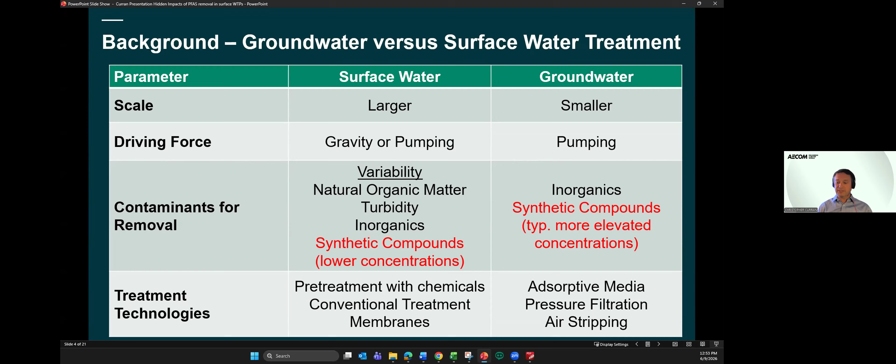And then treatment technologies - a lot of traditional conventional treatment, pre-treatment required for surface water supplies. We see membranes, which is different than more of the pressure vessel type approach, adsorbers, air stripping that we see in groundwater. So when we look at some of the different treatment technologies available, we've talked about some of these.

PAC - we heard some examples, and we're going to have some other discussions around that. Granular activated carbon, ion exchange, and then RO/NF. In the surface water application, we see a little bit less of the RO, just due to some of the points mentioned before about economics and fitting that in. Usually there's another water quality driver present.

In terms of some of the innovative treatment approaches, we are seeing an opportunity for novel adsorbents - Megan was just talking about one. I'll touch upon that in applications in certain sources where there is competing organics, due to their ability to be selective for PFAS adsorption when other background organics are present. There's a number that are commercially available, and a lot in development right now.

There's some hybrid approaches where we combine GAC and ion exchange as part of a treatment train, depending on objectives and water quality. And then, as touched upon earlier, we're seeing some traction with separation/destruction integrating into the water treatment space. It's typically been reserved for smaller flows, but there are opportunities. Foam fractionation was mentioned, where the technology is beginning to scale up, and there are opportunities which could potentially lend itself to some surface water applications.

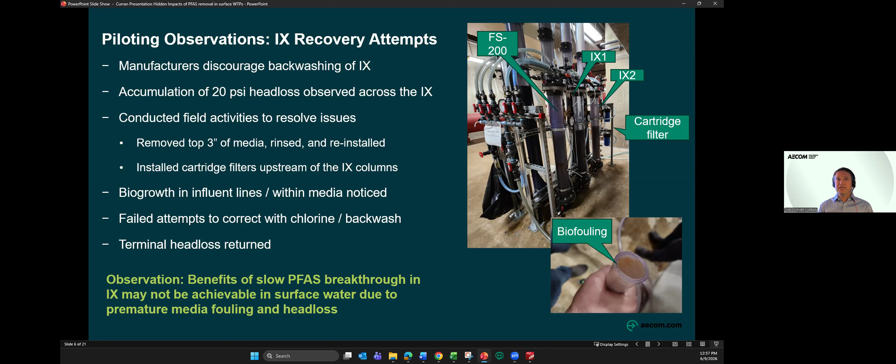We did continue to notice biofilm development within the media and the tubing, which was creating problems for the resin and achieving very high terminal head loss that wasn't able to be restored. We even used chlorine and did backwashing, and we were still at terminal head loss, so I had to discontinue the piloting. So just an observation in these surface water applications: it's definitely worth piloting to see if it's practical for your water supply, just to make sure you can get the long-term media life that is preferred with resins.

We also looked at novel adsorbents. We've looked at a number of them, but in this example, this is the CETCO FS-200 product. What we observed is we got a little bit more life than the resins, but we did start to identify some head loss development in the media.

We were able to backwash this media on a typical one to two week frequency, but we did start to see some accumulation of head loss. We observed pucking, media cohesion of the FS200 in the column. So we started introducing air scour, which was able to restore our hydraulics and continue with the pilot there.

In other applications, that air scour really wasn't able to free up the cohesion that was observed. So we actually terminated that column and switched to an FS400 product, which is a larger grain material. You sacrifice a little bit of PFAS capacity, but improvements with the hydraulics were very significant, and we've been running that column pilot since with routine backwashes. It's performing very similarly to GAC. So that was an approach we could take to make that a viable option in surface water.

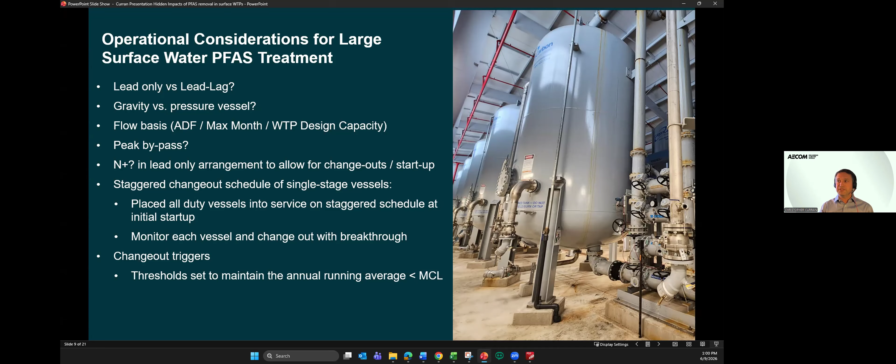Also, the number of spares you have - we heard about the length it takes for backwashing, for taking media out of service, for filter-to-waste scenarios. So having N plus 2, or N plus 4, depends on what the utility is comfortable with to allow for that. And as discussed earlier, there's a lot of benefit in staggering the media so you don't have all of it exhausting at the same time. That would be a significant operational burden to replace all that media at once. So those are some of the considerations.

Also, PFAS is the first major treatment-changing regulation we've seen in a generation at water treatment plants. So a lot of our facilities have limited space, and introducing this new PFAS treatment in a surface water plant can be very large in footprint.

Retrofitting of existing filter bays is an option for some utilities, especially if they have excess capacity within their existing filter beds and adequate depth for installation of the GAC. With modification of under drains, you can potentially provide sufficient empty bed contact time within existing beds to get not only the turbidity removal still required in this filter adsorber arrangement, but also the PFAS removal. This could be a potential opportunity at some utilities and a big cost saver.

One thing to be aware of, especially going from a mixed filter bed to a carbon-based one, is the filter runtime frequency will compress with the smaller grain media. There's more head loss, so you really have to do some gravity-based piloting to make sure your hydraulic grade line can accommodate it, or implement some pumping. The unit filter run volumes will also reduce with the carbon-based approach, but these are things that may be palatable with a particular utility.

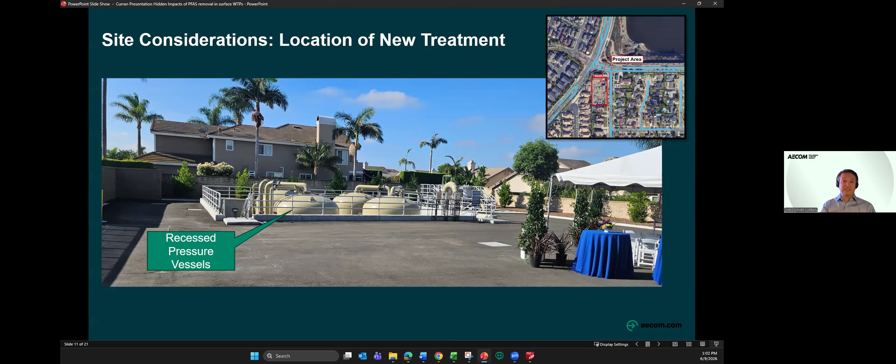Other site considerations include the location of the vessels. We had a site out in Orange County, California, in a complex residential area, where it was preferred to keep the vessels out of the view shed of the surrounding community. So recessing of pressure vessels is something we've done at a number of facilities, whether due to a building height restriction in an ordinance, or to blend better into the community. That's a site constraint that has to be considered.

We'll talk later about residual management, but here are some findings. A large eastern U.S. water treatment plant had PFAS levels in the 1 to 2 nanogram per liter range in raw water, so it wasn't a compliance issue for this facility. But they had historic lagooning of solids where solids had been accumulating for 8 years or so. Looking at the filtrate from that residual stored for a number of years, we see some elevated levels, not significant like biosolid levels, but you can see PFAS collecting in those residuals. Just something to be aware of, depending on how regulations track in the future.

Also with DAF residuals, we understand PFAS removal is not significant or reliable in terms of compliance, but we have observed some concentration factor of PFAS in a traditional DAF sedimentation process. They're not at concentrations causing any issue, but because of that preference, as we see in foam fractionation for the air-water interface, you can get some long chain compounds moving out with the float from the DAFs.

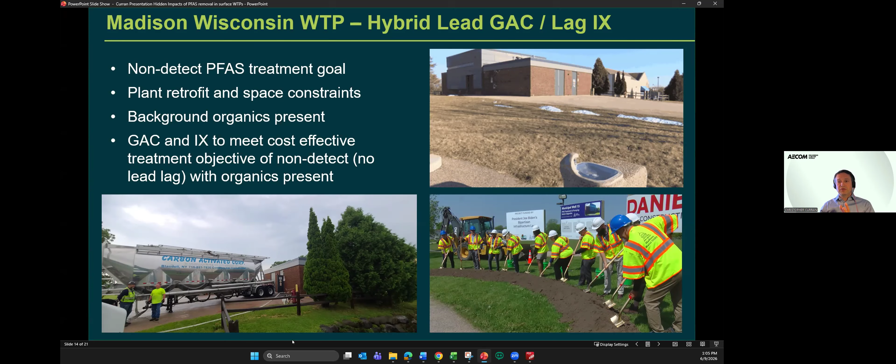One of the drivers was background organics present in the source water. In this instance, because of the retrofit and the end criteria of trying to achieve non-detect, a carbon lead with a lag ion exchange resin vessel was implemented. It's been in service for about a year now, with the GAC media still removing the bulk of the PFAS. We're starting to see some short chains come through, but the resin is there to be the main removal for the PFAS present in the source water.

The second case study is Tri-Town, Massachusetts regional water treatment facility. It's a reservoir supply, about 13 million gallons per day, with PFAS ranging in the 20 to 30 nanogram per liter range. It's going into startup and operation right now.

In looking at this and how to integrate treatment for PFAS, we looked at a number of different scenarios, some of which were tertiary slipstream or side stream treatment with carbon or resin. But we also looked at the filter adsorber approach using carbon for both turbidity removal and PFAS. Because of a number of drivers, there was also a TOC removal objective as part of this project, and at the time the regulatory body was not interested in side stream treatment, so PFAS treatment would have to be applied to the entire train.

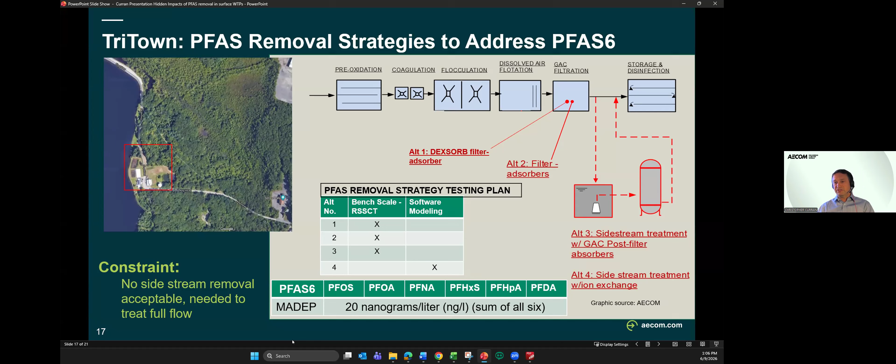We had to increase the surface area of the filter to get the target empty bed contact time, and it's going into service right now at the facility. Some of the operational considerations just during startup is that backwash, that initial backwash to remove fines, is quite significant.

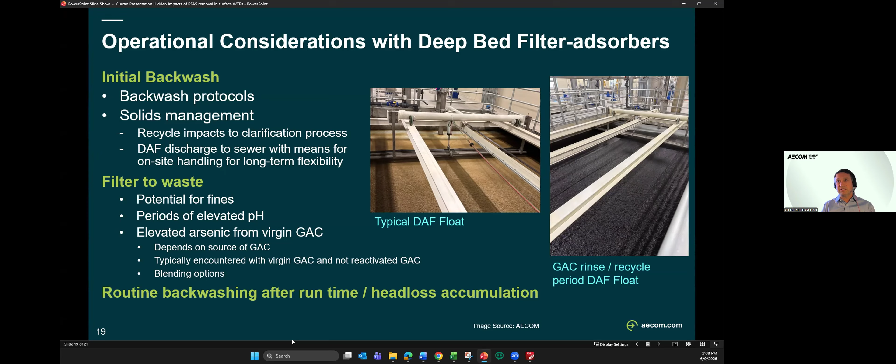Also mentioned earlier today is filter to waste, having provisions to waste any additional fines that may be present or any periodic elevated pH or arsenic that's bleeding off the media, to have provisions built into the design to address that. And going forward, since these are filter adsorbers, routine backwashing is necessary. And I talked about the frequency of that may be reduced in a carbon-based versus a traditional multimedia filter.

So in closing, in terms of lessons learned, integrating PFAS treatment, as we've heard from a lot of others today, is a lot more challenging in surface water applications relative to groundwater. That scale and variability really needs to be looked at, those seasonal water quality drivers. And pilot testing is very, very important and informative for basing design around. So very, very involved. New technology really needs to be evaluated before applying it large scale like that.

So, looking at these novel adsorbents, looking at maybe a potential down the road of foam fractionation in a large water plant, that testing is very important. And then building in operational flexibility is very important for these systems as well. And with that, AJ, I can take some questions.

All right. Well, that's me next to a big truck. Little background, I've been treating PFAS since 2014. Previous life, I was a municipal engineer. I had the good fortune or bad fortune of having two clients adjacent to a military base and just swimming in AFFF. So I've been doing carbon and ion exchange since 2014, and it never stopped. So let's talk about residuals.

Let me see. Oh, you know what? You guys are probably seeing this. How do I get rid of this? Let me get that out of the way. It all looks good. Oh, you're all good? Okay. I couldn't tell if you were seeing my... Nope. Perfect. Okay, great. All right.

So basically, how are we getting residuals? We've got PFAS being manufactured, it's being used, and then some form of pollution finds its way into the water supply, and we're going to deal with the aftermath of treating water and wastewater, and what the wastes are from the treatment system. So we've got multiple types of treatment: powdered activated carbon, granular activated carbon, ion exchange type removal systems, and there's also membrane treatment systems as well.

And basically, what this boils down to is you've got solid residuals to deal with, or liquid residuals to deal with. There are also gaseous residuals, and we'll touch briefly on that, but it's not really something that municipalities are going to have to deal with necessarily.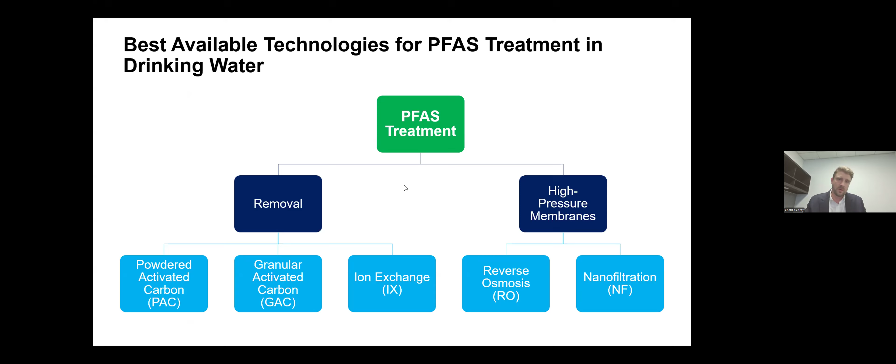All right, so excuse me, I thought I got rid of that.

It's got a finite capacity, and basically you've got two options. You can reactivate that carbon, or you can send it off to a landfill. And that's kind of a similar story for your novel sorbents and your ion exchange, especially if it's a single-use IX media.

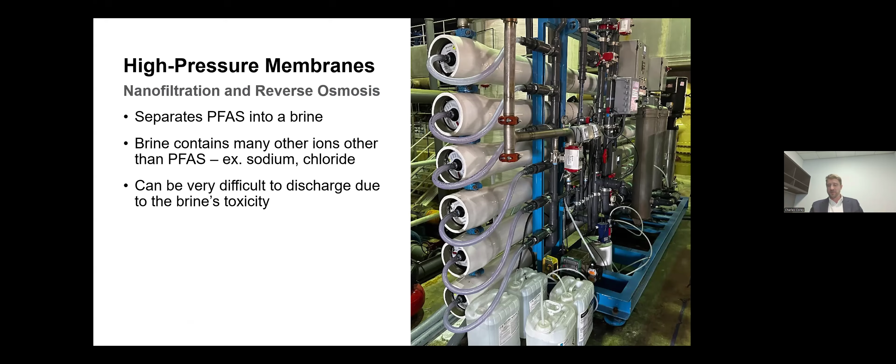High pressure membranes, it's a slightly different system where you've got a reject stream, which is highly concentrated brine, highly concentrated PFAS. You've got a couple options here. Preferred option here in the Northeast, because we aren't allowed to do injection wells and we're not close enough to an ocean to get a permitted discharge, would be treating that brine stream with carbon, and then you have a solids residuals to deal with. But it's pretty nasty stuff when that comes out of these membranes. All right.

So in the solid phase, we're talking landfills or thermal treatment. Basically, finding yourself an incineration facility, and that could be through your environmental hauler. They'll have on contract their facility that they'll haul to based on your geography, and those facilities that can reach the appropriate temperatures to fully destroy PFAS are few and far between. So trucking is probably one of your largest portions of that expense, or a significant portion in terms of dollars per pound that you've got to dispose of.

So you've got your spent media, that's most of your issue, and that could be the GAC, your novel sorbents, or your ion exchange resins. You've also got biosolids and sewage sludge, which we don't talk about very much in this presentation, but it is something that on the wastewater side we'll have to address. But I think landfilling it right now is your best bet. For the liquid phase, we're talking about underground injection or thermal treatments. And then the gas phase, you're looking at a scrubber or some sort of thermal destruction methodology.

This is just a highlight of what I just said. Basically, these are your disposal options. You can reactivate, you can incinerate, or you can landfill, or a combination thereof. GAC, you can get on contract with many carbon suppliers, including Calgon or Norit, and they will reactivate your carbon. You lose about 10 to 15% through attrition, and they'll add some makeup media to your specific carbon before they return it back to your plant for reuse. That seems to be the preferred method for large scale GAC.

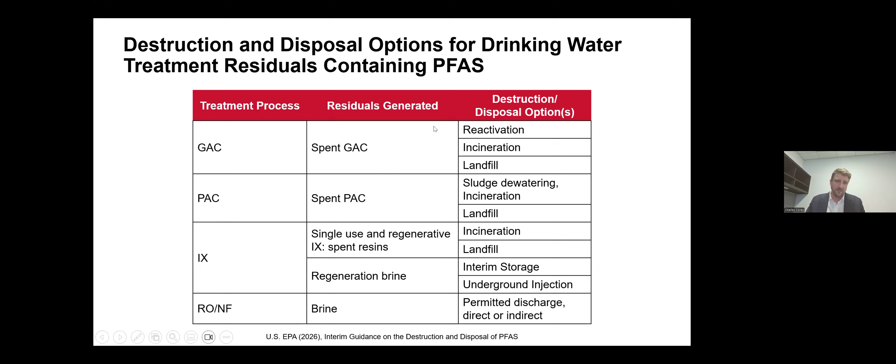And then the same deal for the brine from reverse osmosis and nanofiltration.

So let's talk about some of the benefits and challenges. We'll talk about solids, liquids, and gaseous wastes. For your solid wastes, landfill disposal is probably the easiest thing we can do: take that spent media, put it in a truck, and find a landfill that will accept it.

The risk is reduced in that the PFAS is stuck to the media. You're not worrying about it leaching out on your property or facility. It's taken away entirely to a landfill. As long as that landfill has an adequate leachate treatment system, they're now on the hook to deal with any PFAS mobility after that.

It's kind of an unknown though. Right now that's acceptable, but regulations can evolve, and landfills may or may not be accepting PFAS-laden waste in the future. I think that's probably your biggest risk, and that points you toward the incineration avenue. In a perfect world we would all incinerate, but what are we doing? The fluorine's just going up into the atmosphere, and it's going to rain back down on us at 10 parts per trillion. If we're comfortable with that, that's what we have to do.

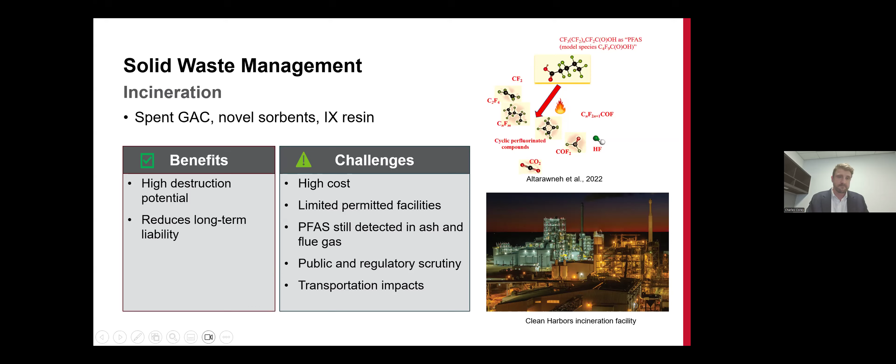Reactivation, we kind of talked about this a little bit. GAC reactivation: if you're not familiar with the process, you're partially burning the carbon.

I apologize, I keep getting IM chats popping up. I hope you guys don't see those.

You're partially burning that carbon to basically free up more pore space. It's probably been discussed ad nauseam at every conference we've attended in the last two or three years, but it really does reduce the volume of waste, especially at the scale of some of these larger treatment plants. A 200-plus MGD plant needs multiple millions of cubic feet of carbon that they're going to replace cyclically throughout the year as they rebed their deep bed GAC contactors.

That's a lot of volume of material to manage, and if you can reduce the amount that makes its way to a landfill ultimately, then I think that's a much more sustainable approach. It also reduces the demand for mining of virgin GAC, because your makeup is only that 10 to 15, maybe 20% that's lost through attrition.

It could be lost through the incineration process. It could be lost in the shipping and handling, as that material is being transported down the road. Visualize a truck bouncing along the highway - carbon media is very delicate and very fragile, so it's basically being ground down to a smaller size.

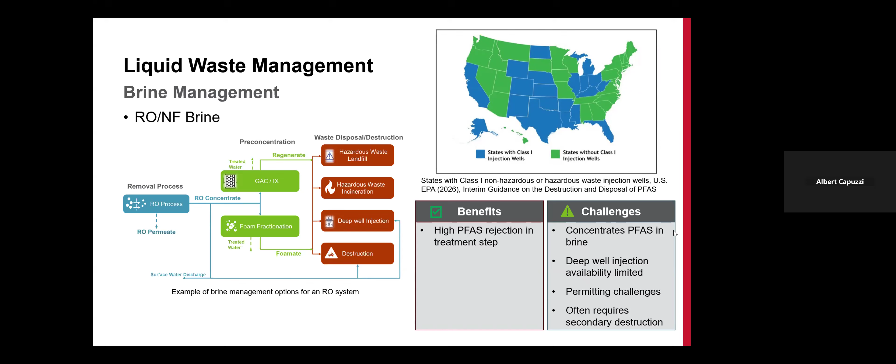All right, last slide. There are a lot of publicly available documents on best practices for residuals handling. Some of them are put out by the EPA. There's a WRF 5285, which is something HDR worked on, and I encourage you to take a look at those. There's a lot of great information there that I didn't really get a chance to go into in the 15 minutes we were discussing.

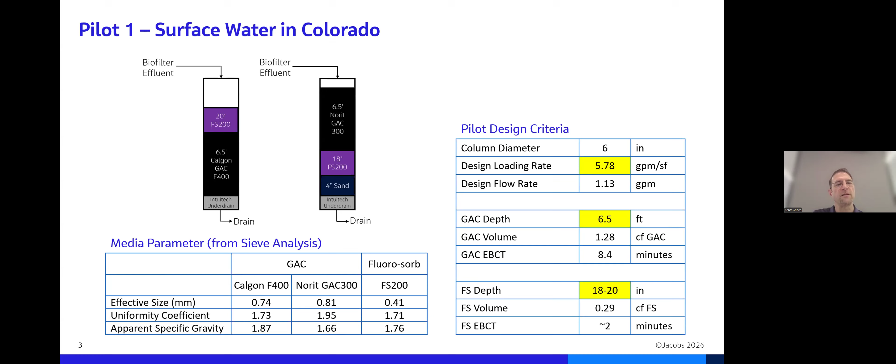So when we set up these pilots, step one was to add the GAC, either in column one, or the sand and Fluorosorb in column two, backwash that media to remove fines, and then add the opposite layer on top, whether that be the Fluorosorb or the GAC on top, and then fluidize the complete column to not only re-stratify the layer below, but remove fines and stratify the upper bed and keep everything segregated.

What we found is everything mixed immediately after installation and backwashing. What I will say is because we had it this way, and for this particular site there weren't necessarily constraints to say this would be a bad idea, we actually ran this pilot initially, and I'll show you some data from that.

Moving forward from there, you're moving on to 400 and 600. We stuck with the Norit GAC as a particular carbon, and you can see the effective size and the specific gravity of each of these media. The carbon was a little bit bigger in size than the Fluorosorb 400, but less dense than the Fluorosorb 400. So bigger size, but less dense.

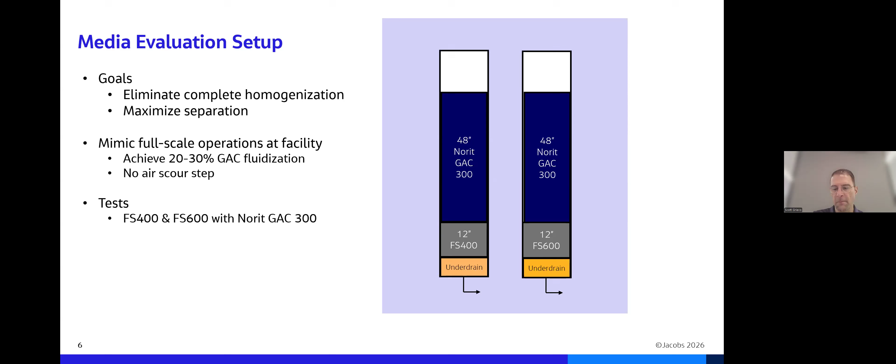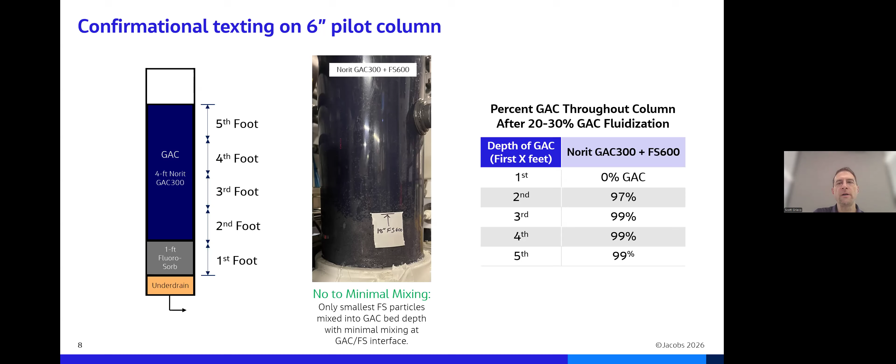So, problem solved there. That's pilot number 1. We did the same thing essentially at the same time in a different part of the country, for a different surface water, in Virginia. The selection of FLUOROSORB at that time was the same, but interestingly enough, we selected a lower density carbon than what was used for pilot number 1 in Colorado. This carbon is an Evoqua, or Xylem, carbon that's actually a subbituminous coal - a very, very low density coal.

So from a PFAS removal standpoint, you can see here this is the first pilot - this was the picture I showed you that was essentially completely homogenized. That system was run comparing GAC only in one column, FLUOROSORB 200 in the next column, which is in green versus that light blue, and then the two different mixtures of GAC. As I mentioned before, we started with the 400, the GAC 400, on the bottom, which got completely mixed, and we started with the GAC 300 on the top, again completely mixed. You can see the performance there between the four columns - the combined column still performed much better than either of the medias alone.

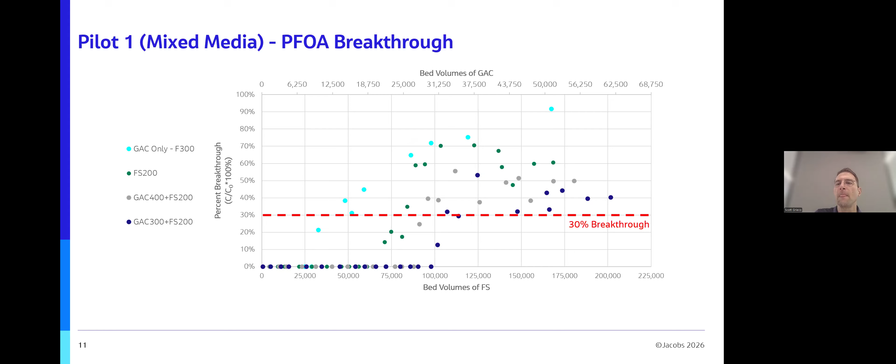We took that data and looked at what would be driving the change-out economics for a 7 MGD system. If you're looking at GAC, to meet the TOC target it ran to about 40,000 bed volumes of the combined bed, but it broke through at about 19,000 bed volumes based on the target PFAS, PFOA at 3 nanograms per liter from that previous graph.

When we looked at the Fluorosorb combined with the GAC, it increased the Fluorosorb breakthrough to be very equivalent to the TOC breakthrough, so the total bed would be changed out about the same time as we'd typically change it out for TOC. That meant the economics were meaningful in terms of reduction in replacements, resulting in cost savings. Because Fluorosorb costs a bit more on a unit basis than GAC, even though the bed volumes were essentially doubled, the cost savings wasn't quite in half, not only because of the relative cost of the media, but the differences in the volume of each media in the bed.

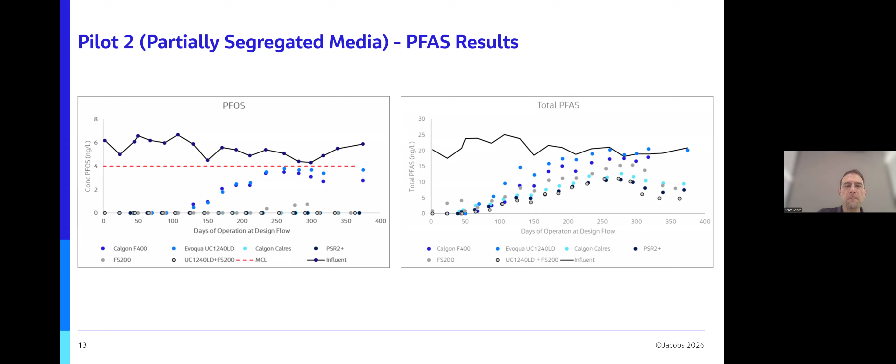So that's the PFAS data. We were also very concerned, obviously, if we're going to be using this combined approach, there's got to be a driver for it. One of the drivers, as we talked about earlier, is TOC.

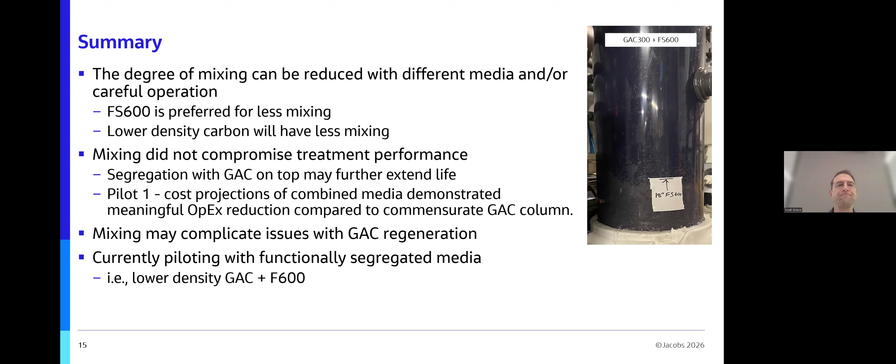With that, I can take some questions. Yeah, great. Thanks a lot, Scott. We do have some questions, so we'll go right into it.

Question number 1: in pilot 2, was the total PFAS PFOA plus PFOS, or was it other PFAS compounds? It included a few other shorter chain compounds, and I'd have to go back and take a look at the data. Put it this way, from a math standpoint, the PFOA was around 3 and the PFOS was around 6, so that's 9. We had about 20 coming in, so there was definitely a smattering of PFBS, I think some PFHxA, and definitely some PFHxS.

Next question. Have you had a chance to look at the permitting side of mixed beds with regulators for PFAS removal? We have not explored that to any great degree from a practical implementation standpoint because we haven't gotten that far ahead. We've had some preliminary discussions, especially with the regulators for the Colorado project. There weren't any immediate roadblocks in terms of any concerns, but we certainly haven't driven it far down the permitting process, being that it's only being piloted right now.